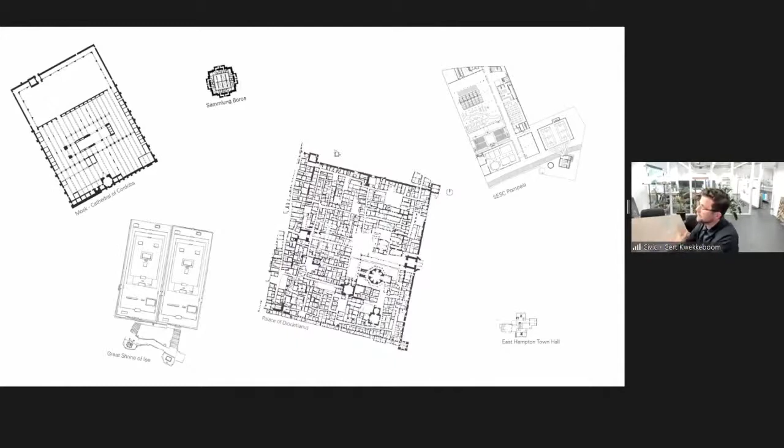So how buildings grow old is one of the topics we like, and we did a bit of exploration a while ago with some projects that are really old, just to understand what happened to these buildings and how they survived time and how they survived societies. So we built up these timelines to understand. This is the Mezquita Mosque from Cordoba.

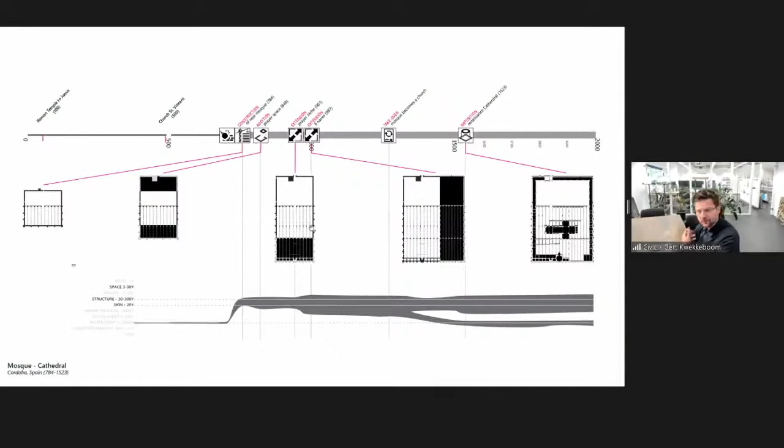It was also in Jan Brütting's lecture I saw, with a structural system that's been constructed, that's been changed, that's been occupied and taken over. And actually, this kind of life cycle, life event timeline helps us in understanding how buildings can survive, how they can last longer.

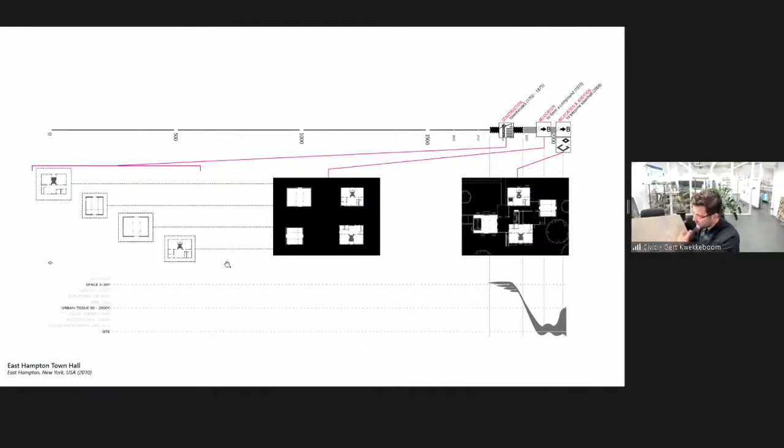This is another example of the East Hampton Town Hall in New York, where little saltbox buildings that were built all over the region were collected and transported to form a new city hall, a new town hall, with vernacular architecture, literally transported. So we did a little bit of research in how buildings last long, how they survive, and it's a thing we hope to learn from also when we build new structures, because I think that's a relevant topic.

We learn so much discovering these old buildings with their heavy structure, with their flexibility. So for us, it's a source of inspiration.

But we also learned that there's not only a physical aspect to durability and to maintaining matter, but there's also very much a more cultural aspect to it.

Because if buildings need to survive, they need to be loved, or they need to be incorporated in the common history, the common knowledge of a society or a community. And maybe it needs to be part of the rituals that have been taking place.

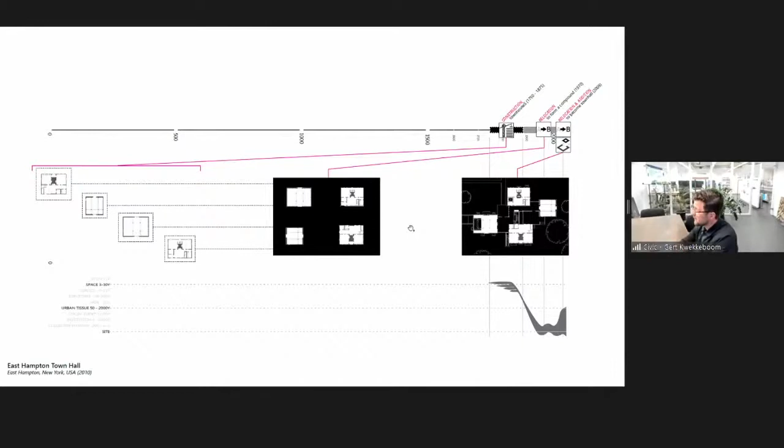One of the projects we've been doing in recent years is the LocHal Public Library in the fifth biggest city of the Netherlands. It's called Tilburg, in the south.

Tilburg is a late industrial city. It only grew, I think, after the 1920s, last century. And it mainly grew because the main Dutch railway company built a very big workshop area there, a place where they built locomotives and carriages that were transported all over the Netherlands. They were the main employer of this whole city, and everyone living in the city has relatives or family who worked here.

So this was the hub, the motor for developing this city in the early 20th century. But obviously later, as cities grew and city centers developed, the question was whether it was really wise, efficient, and healthy to maintain these functions in the city. So they moved out. But this very big industrial area, which was part of the collective memory of the inhabitants of Tilburg and all the family stories that went with it, was being redeveloped with commercial partners.

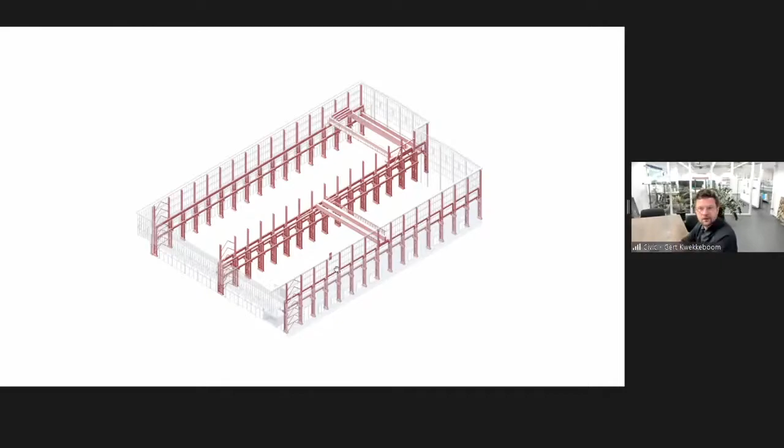So the basic strategy for the building is to weave a new public plaza into the existing structure, positioned here, and to find ways to fold and bend the new functions so that the monumental atmosphere of this industrial cathedral, and the spatial impact it has when you enter it, is maintained and brought further. It's really different than when you see the photos, I promise you.

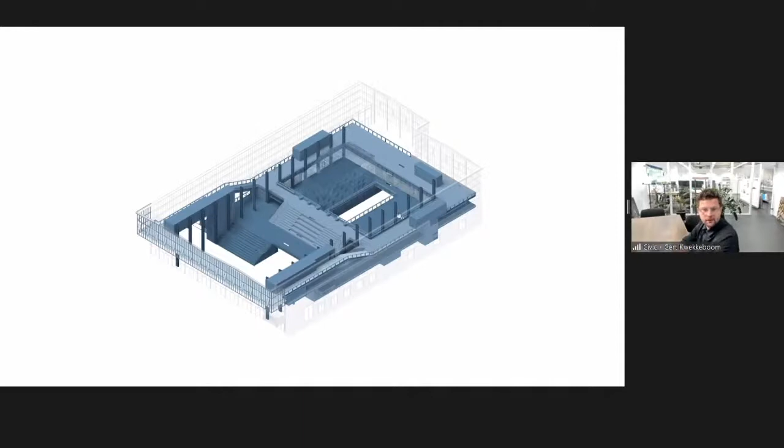So a landscape of sloping areas and stepping terraces goes up, where the more quiet, reading-related functions are high up in the building, toward the light, and where the children's activities and meeting spaces are much more on the ground floor.

The result is a very open public plaza, almost an indoor square or meeting space with big steps where you can meet, sit, and also host events. The higher you go, the more library-like it becomes.

But the main ingredients are the entrance zone with a very big reading table on the old tracks that are still present and visible in the building. We didn't polish the existing building - all the marks of use and the paint that's been there are still there.

The cranes too, obviously. And the higher you go up, the lighter it gets and the calmer this space becomes. Since the building is so big, it's really possible to have all these types of functions together in one open space without them interfering too much. That's kind of the gift the existing building gave us.

If such a structure were newly built, the total mass of the building would be much less. So the given building, as it was, really added to the type of library that could actually be built here - something that could never have been built if it were a newly built structure.

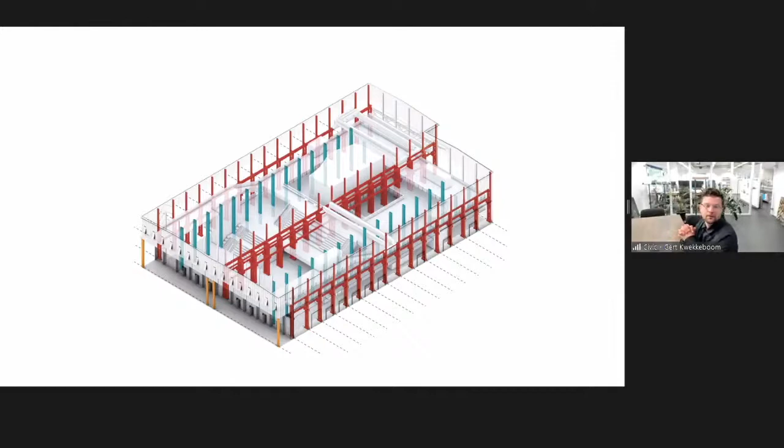Learning from this structural system, which had oversized dimensions and could actually carry more loads than initially depicted, this new structure also adds to the future flexibility of the building.

Implementing the new structure in the same rhythm as the old, finding some kind of hybrid between old and new - not necessarily making them very different. Obviously they are different, from a different time, but building on the structure and details that were already there. The new railings have a sturdy dimension which fits the old structure and are manufactured in a similar way, so the old atmosphere together with the new elements lives on, not replaced, but only augmented, added to, or updated.

Another, more interesting cultural story is the second big industry in the city, which has been the textile industry. So half of the people, I suppose mainly the men, were working in the machine industry, and half of the people were working in the textile industry.

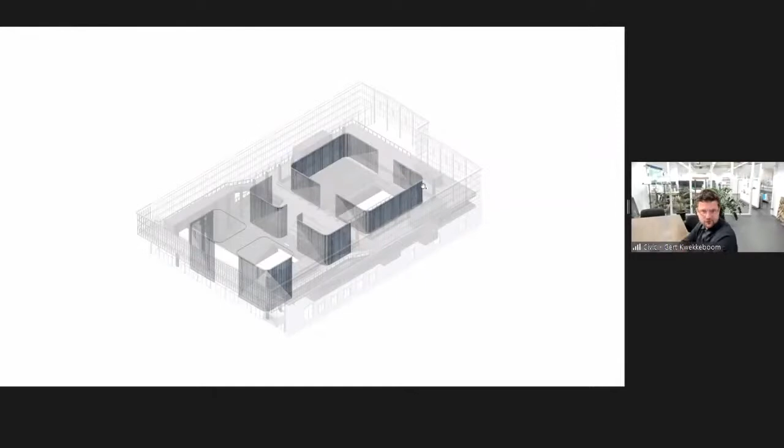With such an open space, we wanted to make a building that is also adaptive and flexible toward all kinds of different uses. Together with Inside Outside, led by Petra Blaisse, a textile and landscape designer, we developed six monumental curtains, which are movable and with which you can close off certain spaces if you have a small event, a lecture, or if one of the cultural institution users has a closed event going on.

That enables the building to be open when nothing's happening, when everyone can just wander around, and if there's an event, these textiles can move and define spaces, and then this reading table can become a podium, a stage for dancing or theater performances, with the big staircase acting as a big auditorium.

And create more intimacy in the area where the youngsters and teenage books are situated, where some hangouts were created, giving everyone the ability to find a place where they can find their intimacy, their own area, and be there for a while before moving on.

Obviously, the textiles are also designed to interact with the light which comes from above, already filtered and softened through the existing opaque glass surface, which brings an extra layer to the experience of this space—like a second layer of this glass skin.

In addition, on the south side, where the new pedestrian boulevard will be executed in the near future, to develop the rest of this whole railway—this former railway maintenance area—the physical part is one: reusing the existing structure, the existing load-bearing systems.

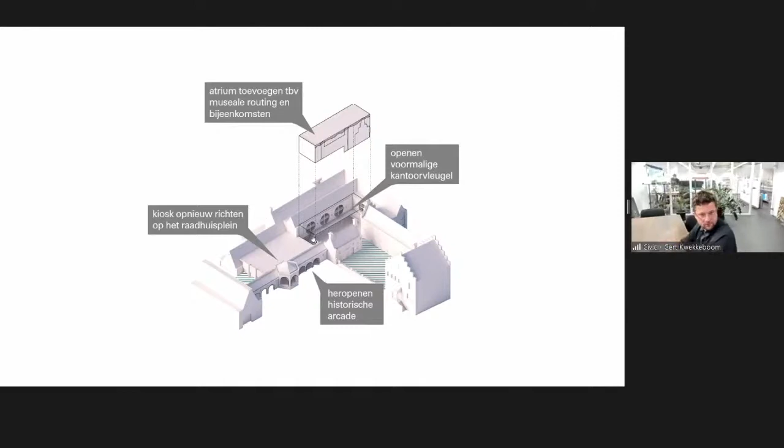So by adding a new cover over an existing courtyard, we are able to transform the whole logistic system of this building, and at the same time turn it into a museum, which forms the new public representational building of the city center.

This is the current courtyard, which will be covered and transformed into something that might look like this—an artist's impression, obviously—where the existing structure of this office is still there and the rhythm is still visible, but also the new meaning of the museum and the open routes through it, with people wandering around, are implemented.

Some of the existing brick will be reused to fill some of the old window openings that used to be here, and to make these big openings, to make it really into a cultural place.

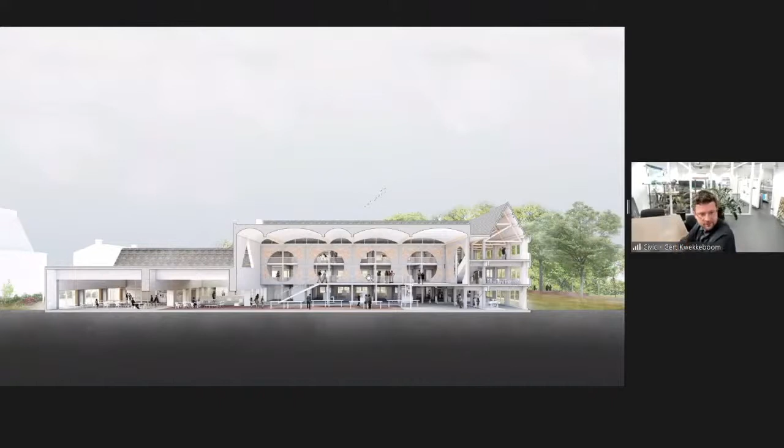On the ground floor, everyone can enter, enjoy the cafe, visit a learning lab, a knowledge center, and not only watch art, but also participate in its activities. This might end up looking something like this, where the old city hall, which was actually an alien architectural system, was replaced by a function that really represents the past of this city, which people can hopefully embrace in the same way as the people in Tilburg have been doing. And then we are able to combine the more physical, but also the more social and cultural durability of communities and their buildings. Thank you very much.

Gert, thank you. It fills me with envy looking at what beautiful projects you're doing and how much fun and passion you're obviously having working with this genius loci and with saving what's already there when it comes to character. Congratulations. We'll continue with the second speech.

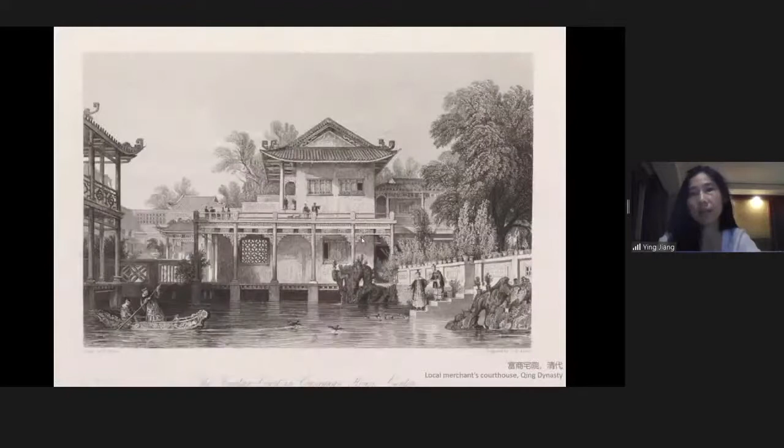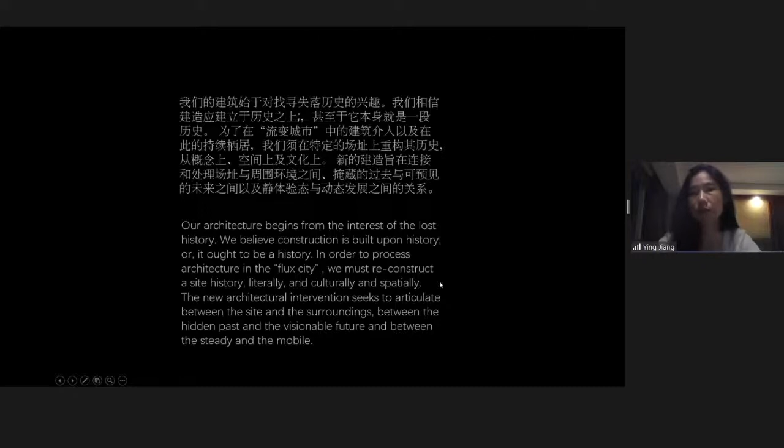Our architecture begins from the interest of the lost history, and we try to link the hidden past and the visionable future through our architecture. I will share 3 projects.

One project is in Lianzhou. Lianzhou is a small town located in the mountains of South China. Going from Lianzhou to other central cities like Guangzhou and Shenzhen is really like traveling through time. This town seems to belong to the past. I would like to give you a 1 minute video.

Lianzhou is a very special place. It's local, and it has a hidden asset. The old city and its living way have been relatively well preserved.

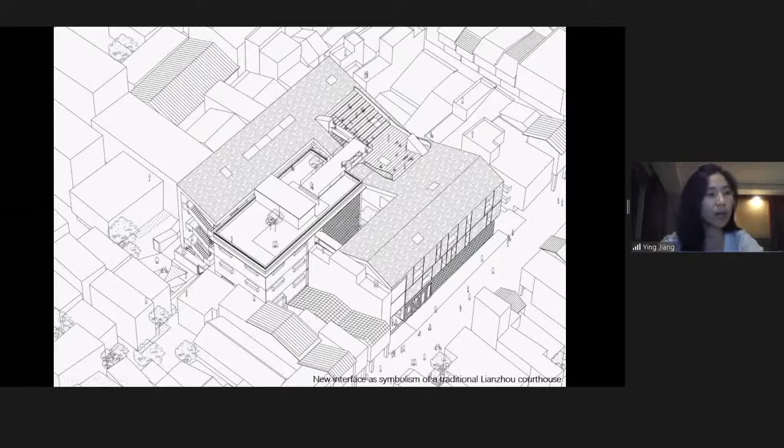We broke down the solid volume of the exhibition space to create a structure responding to its surrounding context, reflecting the collectivity of small individual houses. The photography museum has since the beginning been designed to restore the urban morphology, creating dialogue with the old city.

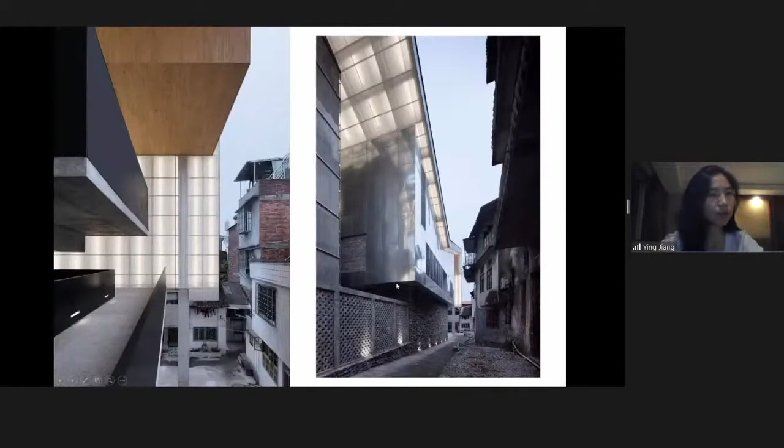All the outdoor space around the exhibition box, including the ground floor and the roof floor, are open to the public, truly realizing the encounter of visitors and locals. All the common areas of the complex are designed as open space to respond to the subtropical warm and humid climate and reduce energy consumption.

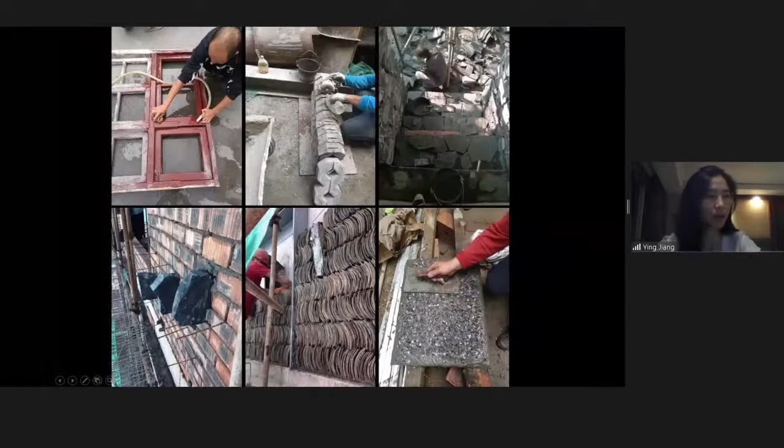various informal public conferences and events are also held on the ground open space. We hope architecture could maintain the city's heritage, both materially and spiritually.

The second and third project I would like to share with you is actually in the same place. It's in Shenzhen, an abandoned factory once again. Shenzhen is the fastest developing city in China.

Throughout the 80s, hundreds of factories were built in Shenzhen, the then newly established special economic zone. This manufacturing-based industry formed the economic foundation for the city.

But by the early 2000s, Shenzhen started to shift from a production to a service economy. Many similar industries either shut down or relocated. Honghua Dyeing Factory was one of them. It ceased operation in 2003, and with its workers diminishing, the factory space was left vacant like this.

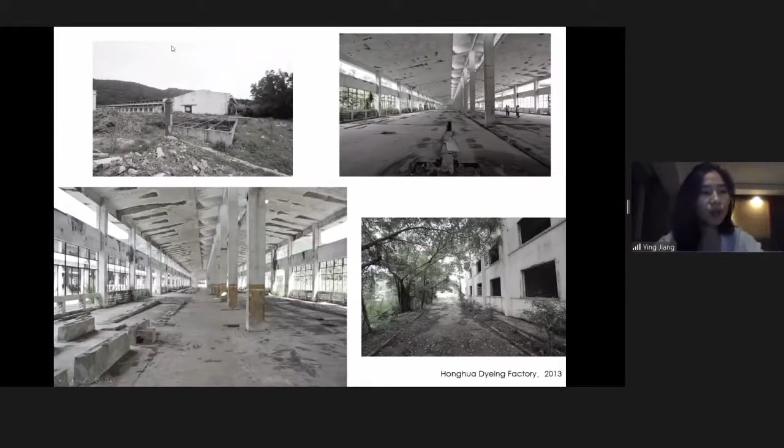We convinced the client that rather than renting office space, the first move should be to create an art commune. Therefore, the first project we got from this site was to transform three buildings into a gallery, museum, and youth hotel.

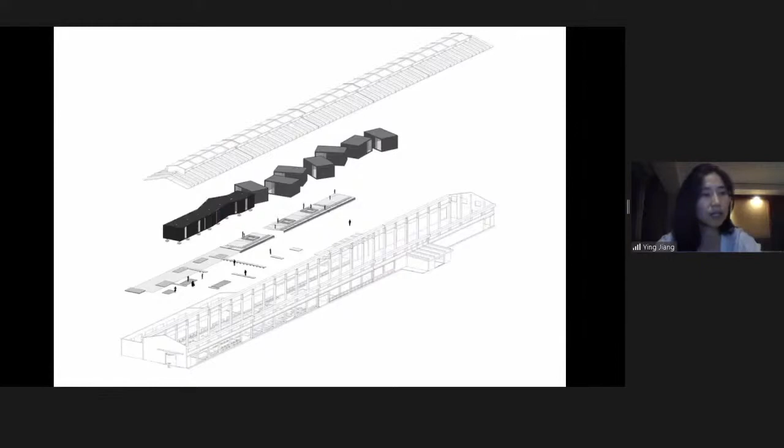Considering the very tight budget of the project, we tried to minimize the new intervention and maintain the history of the site. All new built contents are carefully implanted into the existing building envelope, creating a new multi-layer spatial and time logic into the industrial relic, redefining the indoor and outdoor relation.

It's also an ecological response to the local tropical climate. Materials and construction techniques applied in the project are not alien to the existing building envelope.

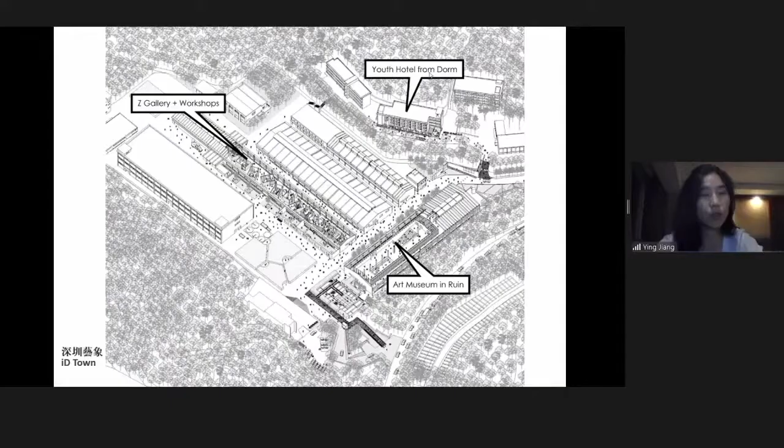And the art museum was designed within the concrete factory building shell. It was the largest space of all the buildings on site.

Instead of renovating the whole building, we considered that the new architectonic should be independently implanted on the original inner ground of the old workshop, which was regarded as a large open concrete pavilion. The ground floor opened in all directions to the public, as well as to the surrounding natural landscape.

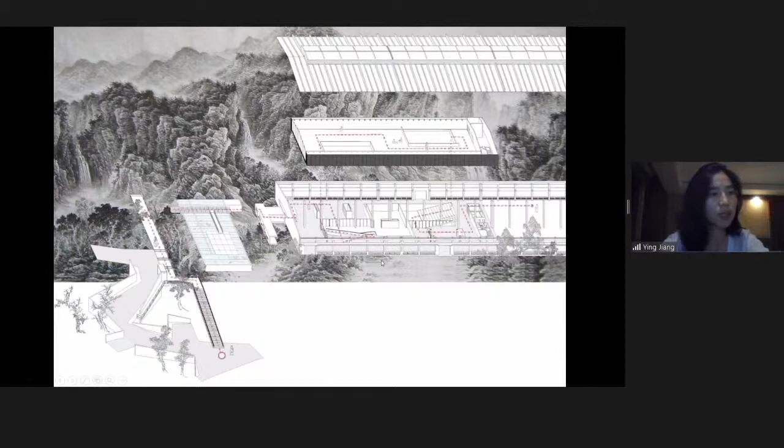The final turn could turn you back to the ground floor with the view of wild greenery outside. Actually, these 2 projects create a new insertion that is simultaneously in stark contrast with the existing industry complex, while the youth hotel adopted a different design strategy due to the program of collective housing.

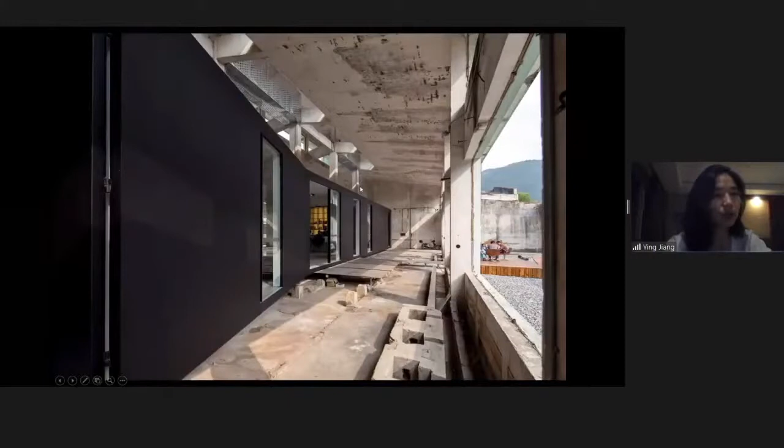The design for the art museum and Z Gallery takes the original factory building as an existing vegetal landscape condition. In most places, the new insertion doesn't even touch the original structure, yet the factory wall, ceiling, and floors are all appropriated as an intermediary layer between the new volume and the landscape beyond the buildings.

After the completion of these art projects, the place attracts numerous design offices, photo studios, as well as music and performance studios. The on-site small industry and creative workshops have created a community that is more and more close to the idea of an art commune, as in the beginning.

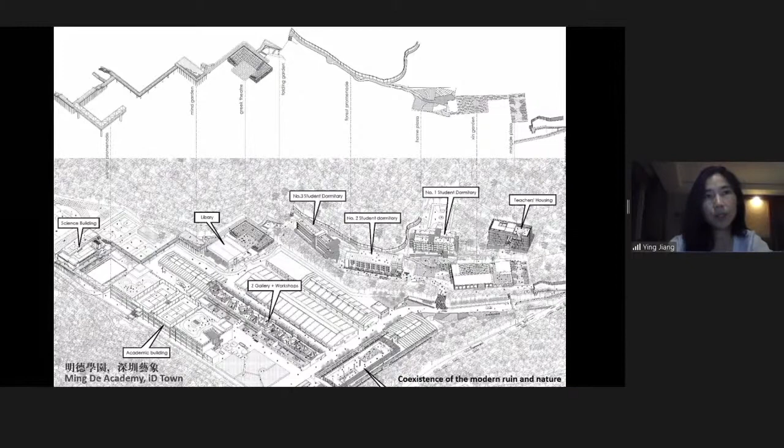Just around 1 to 2 years after the completion of the iD Town projects, Ming De Academy decided to transform part of iD Town into their new campus. We renovated in total around 8 buildings. The idea of a new campus for teenagers to study and live together in this beautiful urban enclave is astonishing yet challenging.

The same as iD Town, instead of trying to erase the imprint of the old factory in a rush to modernization, we maintain the identity and contrast of the new and the old, and keep as much of the fabric of the old, carefully creating new spatial continuity.

What I'd like to say finally is that reusing and re-inhabiting old industrial heritage has recently become a worldwide discourse in urban development. In China, with rapid urbanization, it's still a new trend, but it's becoming more and more urgent as industry moves out from the cities. Many of the former industry sites were transformed for office or commercial use. However, what we often see is that reconversion in general becomes only a new facade plus interior renovation.

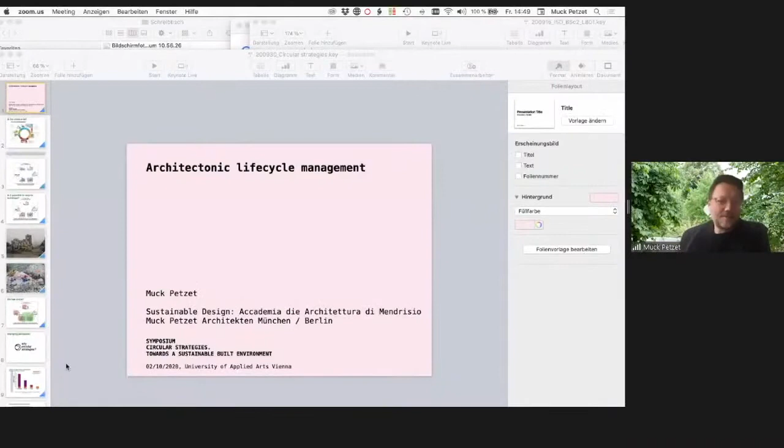Go ahead. Yeah, thank you very much. Thank you also to my colleagues. I knew that there would be lots of beautiful transformation projects or reuse projects, so thank you Gert and Ying for sharing these with us. So I can show 2 super unsuccessful transformation projects. Maybe we can learn from that, and let's say a successful new building, which hopefully is also a contribution to this talk about circular building.

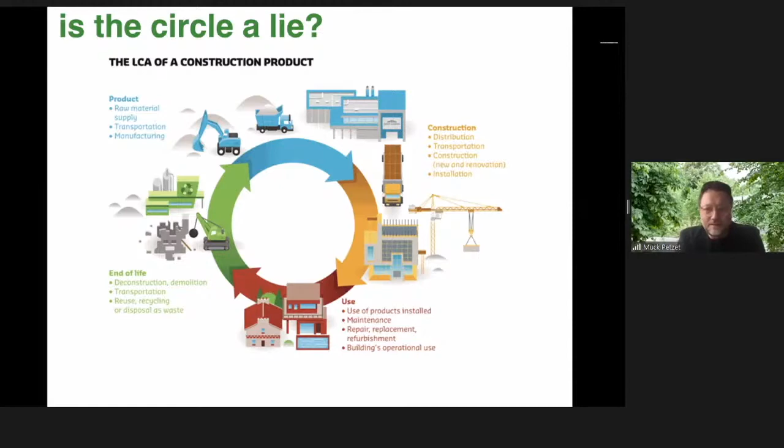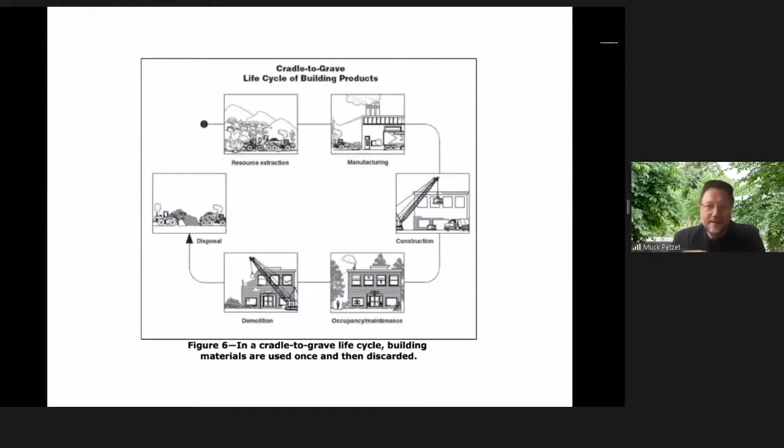We know that this is in fact something like that. Also, some of the schemes we've seen today show that, but still we talk about circular, and we know that it's not possible. We have all these dreams about cradle to cradle, these beautiful ideas about reusing steel structures, and it was really super impressive. But when I did this exhibition, Reduce, Reuse, Recycle, the German Pavilion 2012, I was desperately looking for recycling projects, and they're nearly not existent.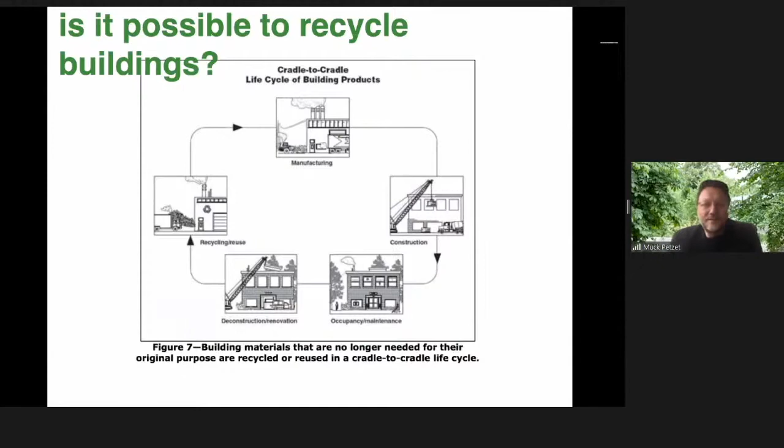What the colleague from EPFL didn't mention is that we naturally have a huge problem storing these building parts. Who would store all these building parts for the case that maybe someone would need them? We have to transport them. So I think even this cradle to cradle, these buildings cannot be recycled. This is my provocative theory here. They can just be reused.

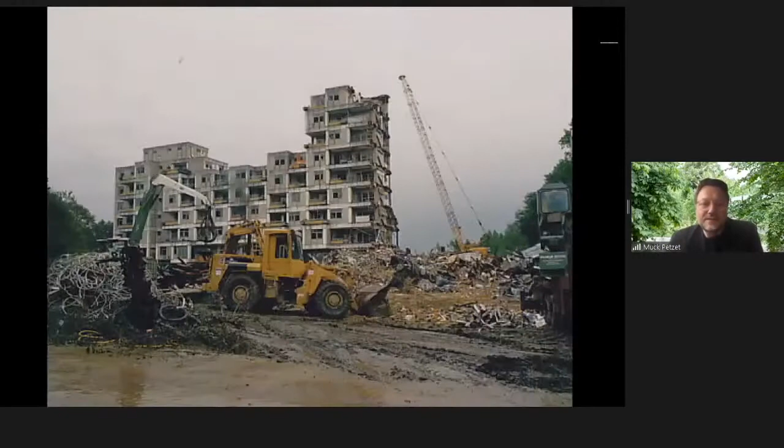This is kind of a little bit like the lie of recycling. We all know that it's a lie, that other dirty processes are happening, and you can imagine that it's nearly impossible. Actually you can recycle some parts, but we all know this is not good. This real circle is somehow, also the colleague from EPFL showed this in his own scheme — I nearly stole it from him — that this circle is not like we have this huge circle here. We have just around, let's say, the existing; we have some possibilities, because the energy is lost inside these buildings.

It's kind of an end point for me. I really have to say, because I've been talking about Reduce, Reuse, Recycle for a long time, and look at this new energy law which comes now into effect in Germany, according to the newest European regulations. There's no word about grey energy in it. Nothing. Nada. It's just going on with this consumption energy efficiency. There's nothing. So I think it's great that we talk about circular strategies, just to make sure that maybe someone will sometimes grasp this idea that there is another form of energy, which we all know, this grey energy.

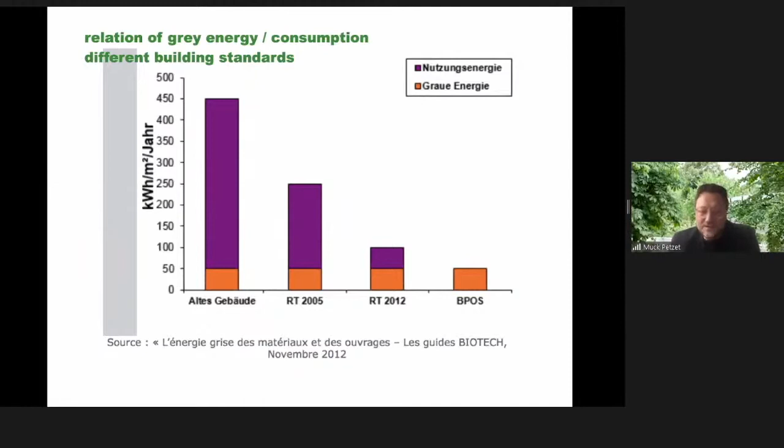All we've been talking about is right today, but unfortunately, it's like climate change, climate emergency, you could say. This is totally clear, and still there's no reaction to it. This is why I'm also provoking, saying we should not talk about circular strategies, because it should be clear that buildings are just an energy and resource dump. We have to deal with it, and we cannot pretend otherwise. This is super dangerous, because this morning we talked about laws, and I think it's super dangerous when we give the impression that there's another way, that we can recycle everything, we can make everything circular.

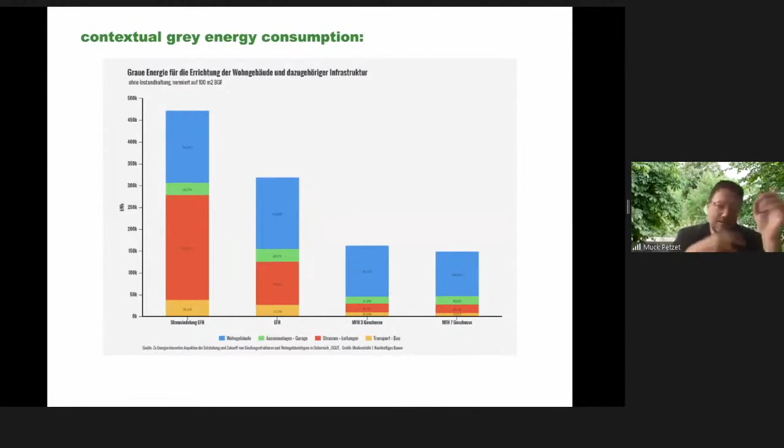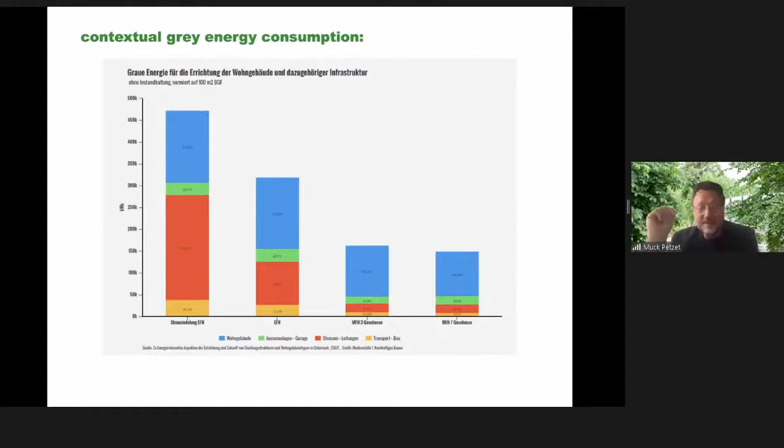This is dangerous, because it opens the mind to politicians: oh yeah, if we just do the right technology, we will solve it. But it's not true. Just look at these schemes about grey energy, you all know that. And what is also very dangerous is how grey energy is calculated, even when we are, let's say, scientists, and we calculate it. At the moment, grey energy is written off after a certain time, let's say 60 years, 90 years.

Theoretically, you can tear down the building and you're still good. This is also a scientific lie, which is at the moment still, let's say, the theory. I tried to show that in 2013 by calculating this building, which was my first calculation, so it's totally unscientific somehow. We also made a demonstration against tearing it down. It might even be saved. It's still standing until today.

But I showed that the energy of use for 25 years, if you look at what kind of efforts you have to put into this kind of tearing down and rebuilding, which is the last column, it's always less good than modernization. And if you look at the CO2 footprint, because you have two different qualities of energy — one, the very dirty fossil energy which is coming into the building process, demolition processes and all that, and then the energy for heating, which in this case is district heating — we see that the CO2 footprint is something totally different. So it would be even better to leave the building as it is than tearing it down and rebuilding it.

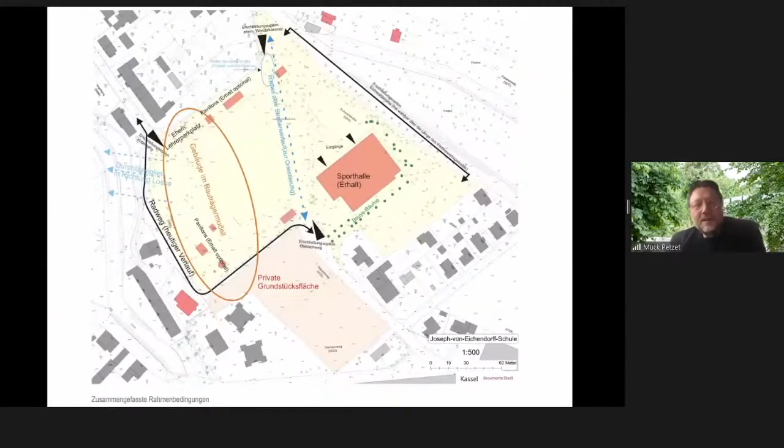It's not existing, and we showed that it's absolutely possible with this existing structure to build exactly what they wanted—a super experimental community building with new kinds of communal spaces in the middle, and individual space all around. You have this generosity of the existing structure.

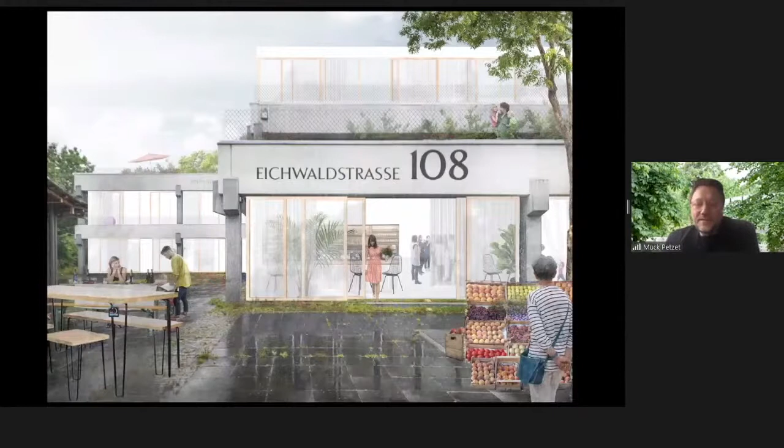We've shown in beautiful images how easy it would be to keep everything, and how it would be exactly what they wanted. But still, naturally, we were kicked out of the competition, and this building is long gone. So this is reality. I understand my colleague Daniel Fuhrhop, who says you have to not allow this anymore—to build this way.

The discussion this morning was very interesting, talking about laws. There has to be a law that prohibits such crazy, wasteful demolition. There has to be a law. There's no other way. This is why it's so dangerous to talk about all this circular stuff—circular economy—because it pretends something.

It's interesting how these images are strong, this circular image. For example, Kate Raworth with her donut economics showed how these images are so important, and how they shape especially the mind of politicians and of society.

We have to find ways—this is before tomorrow's discussion, I wrote this—that we have to compensate for these demolitions if we do them, and put this money towards projects that transform. This is the only way that I think can save us somehow.

Because this is the last option, how to improve the life cycle of new buildings. We all talked about it already: low impact materials, reduction of materials, recycling materials. For me, recycling is a big, big question mark.

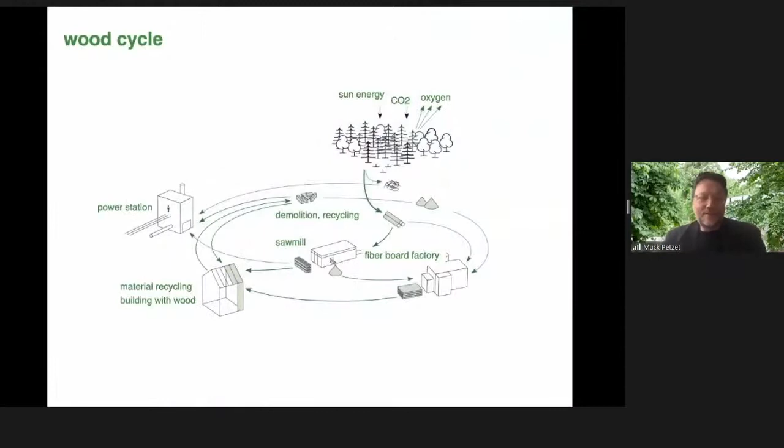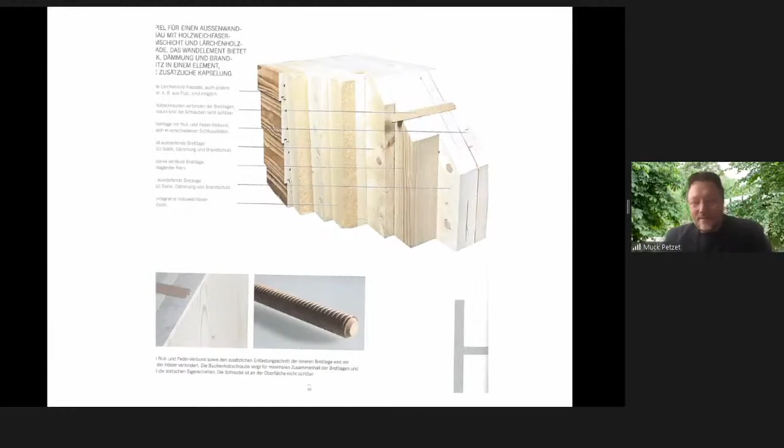So we could not really do that, and then we convinced the client to at least build something completely out of wood, massive wood, as a CO2 storage. We talked about this a little today, at least to create something with a positive impact. It's a very low-tech energy supply, built by the client, and it's really only massive wood, not treated, no glue inside. As architects said, no building without a garage — well, there's a garage inside, so it's also something of a crime, this building. But I said it's unsuccessful.

Just to finish up, one more successful new building, I think, which is also about this life cycle. This is naturally designed by Brandlhuber Plus and Burlon, where we worked together. As the architect said, it was kind of a research project on flexibility. It was really building as research, and this is where the means I mentioned are included in this building.

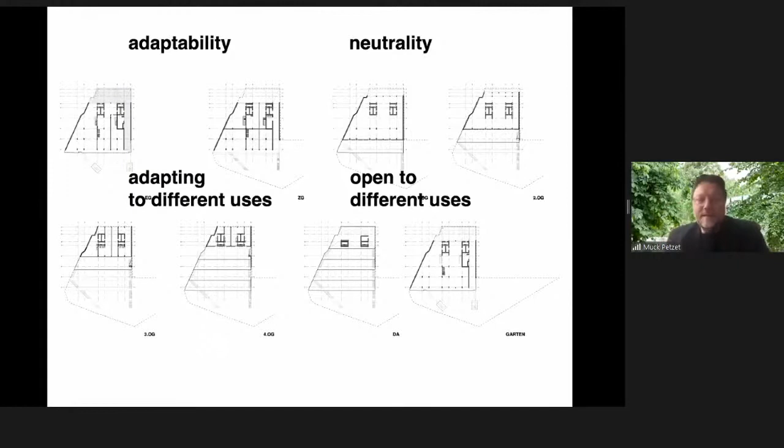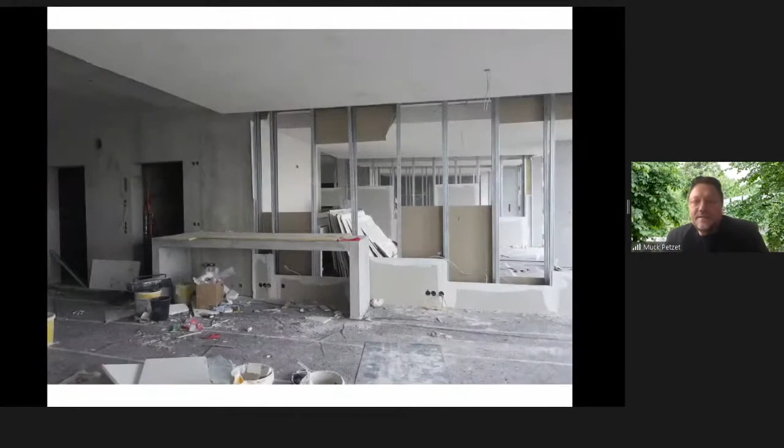You could say it's a very bad building in terms of CO2 footprint. It's built out of massive concrete, so not at all low-impact materials. But it has all these possibilities, this adaptability to different uses. There are 20 different users now inside, with this neutrality and openness — a clear distinction between lasting and exchangeable parts. As you can see here, lots of things are exchangeable. Very, very few parts are fixed.

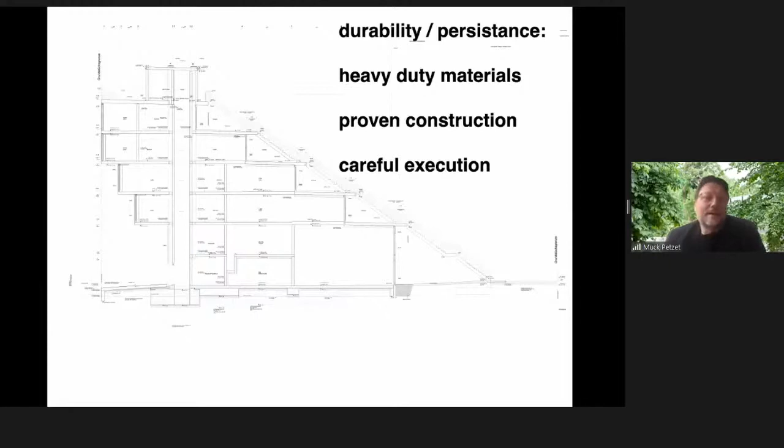We have this super durable robustness, heavy duty materials. We have to say proven construction is a bit critical because even the terraces are only out of concrete. So it was a bit of an experimental building, but a very careful execution — repairability, maintainability, exchangeability, everything we mentioned a little today. Even what you see here is the insulation. I'm really nearly finished, I just needed 15 minutes. So you can even exchange the insulation because it's added where it's needed, and naturally the installations and everything.

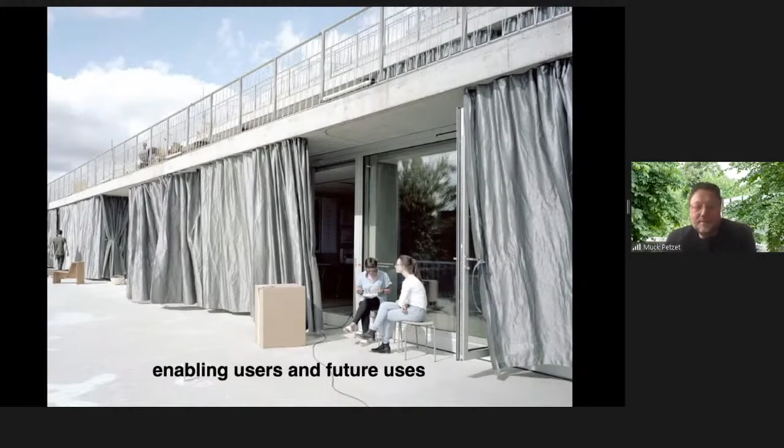And that's just my closing point. If we really build new, I think I would not prohibit building, because we need exciting new buildings too. But then we have to be very, very conscious of what we're doing, and this is also what our colleagues said. Enabling users and future uses is kind of super crucial — letting this software, the user, have its freedom, and creating this generosity where everything is possible. Thank you very much.